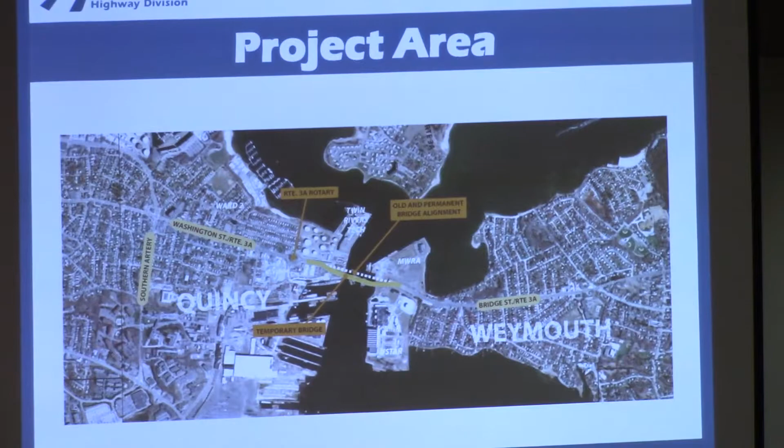Okay, just a general overview of the project. You see the project area. The new bridge will be on the alignment of the old structure, and you can see the temporary structure to the bottom of the page.

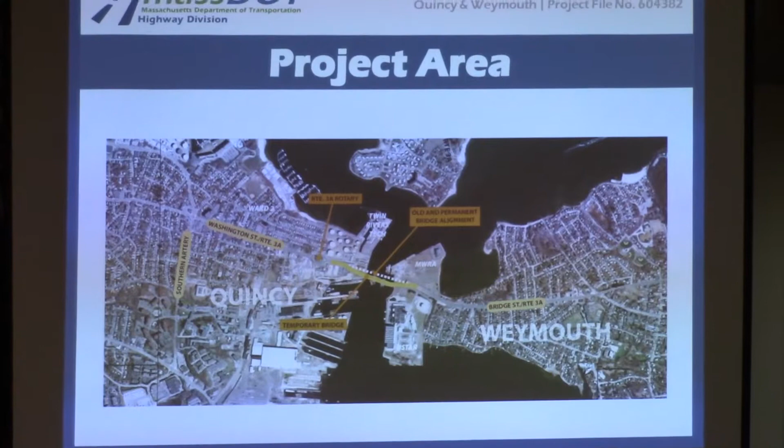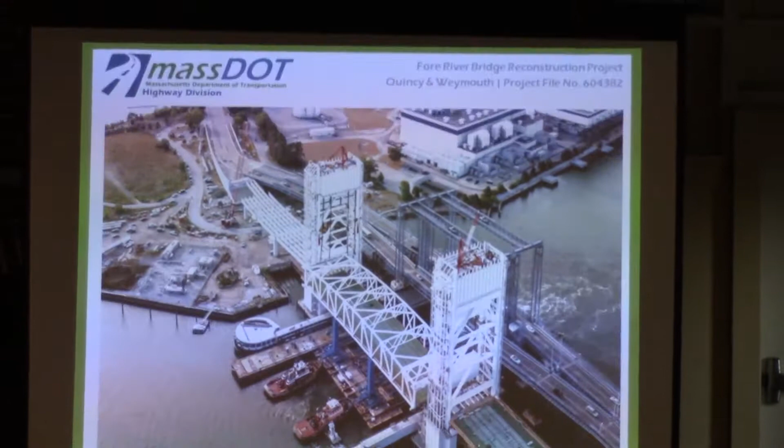Okay, last August, we did the float-in. We had the center lift span. You can see here that came out where it was built in the shipyard. We raised the existing temporary bridge up, came through the channel, turned around here, and then came in and set it in its final position.

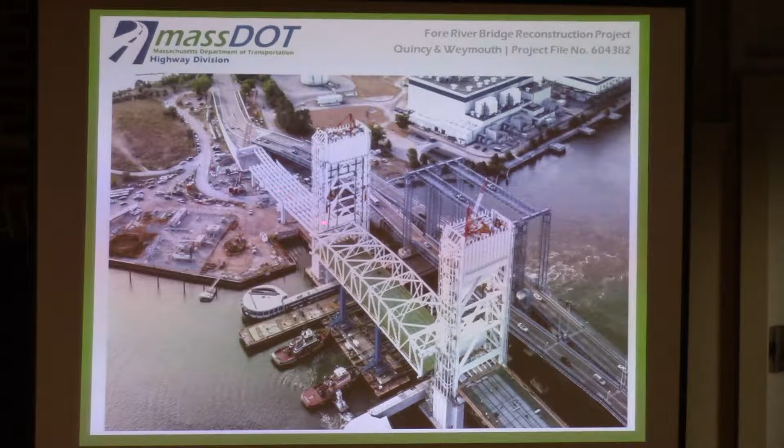What you can also kind of see here as well, again, this is mid-August 2016. You see over here, this is the Weymouth approach at its stage of construction with the girders. And then here in the bottom of the page, you see the Quincy approach. Pretty symmetric about the center of the bridge.

A little bit more of a step back here. You can see the Quincy approach in the foreground, over to the right, and then the Weymouth approach in the background.

The activities that remain to project completion include the remaining approach span work, which has really been in process from mid-May to the end of August 2017. We have existing bridge demolition, starting in September and proceeding until spring of 2018. And then the new bridge protection system, which we'll get into a little bit here, from January of '18 to February, until the fall of 2018.

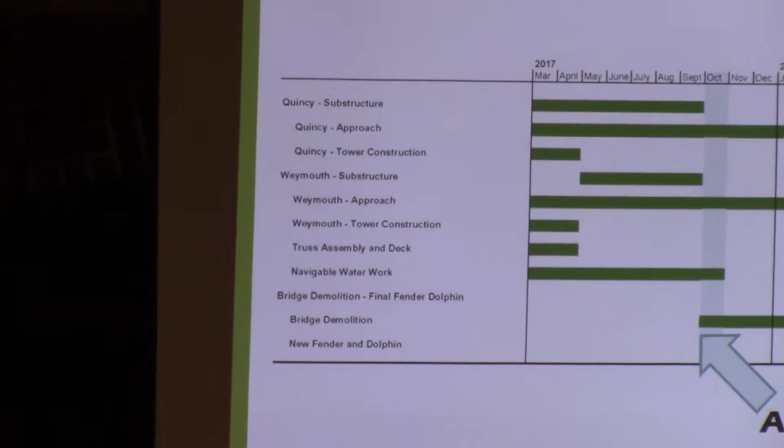A little bit more detail in terms of the schedule. I don't know how well you'll be able to see it in the back of the room, but really, you're looking through 2017, the balance of this year, with the approach span work finishing up here. Then, looking to the bottom, all 4 travel lanes on the new bridge by October 2017. We're going to get into that in more detail.

And then out in 2018, you see these green bars on the approaches. That includes final paving, surface restoration, landscaping, and the like. And then to the bottom, you see existing bridge demolition - that's the temporary bridge. And at the very bottom, you see dolphins and fenders - that's the bridge protection system on the water.

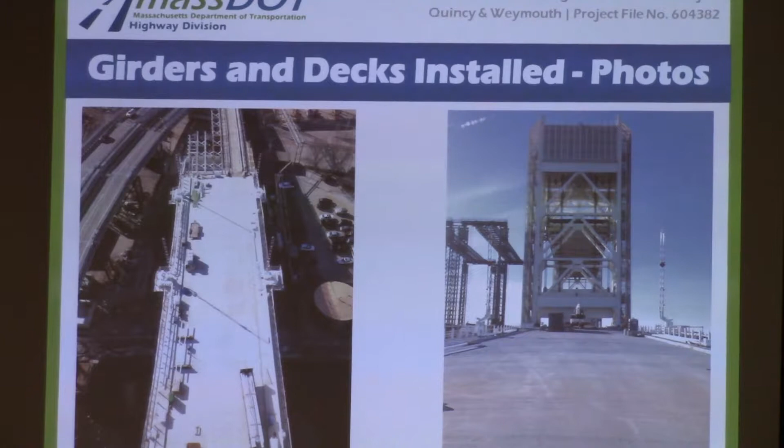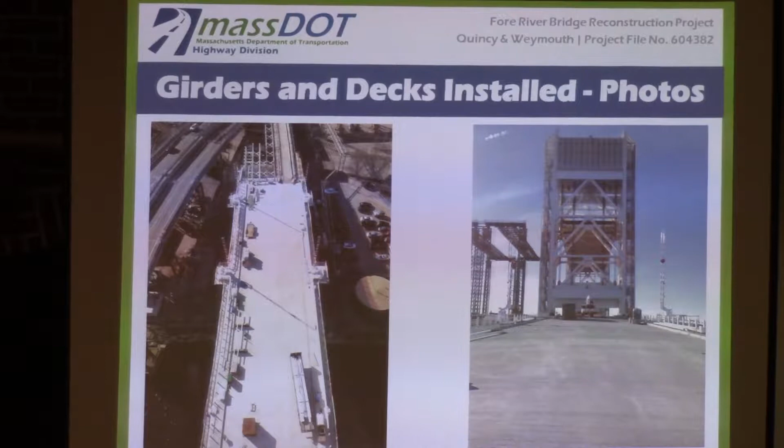What you see here are pictures from the fall, the approaches as they were finished out. On the left-hand side, you see the Quincy approach, the concrete deck slabs and the sidewalks and railing that go into place. And then on the right-hand side, you see the Weymouth approach. Both very much the same.

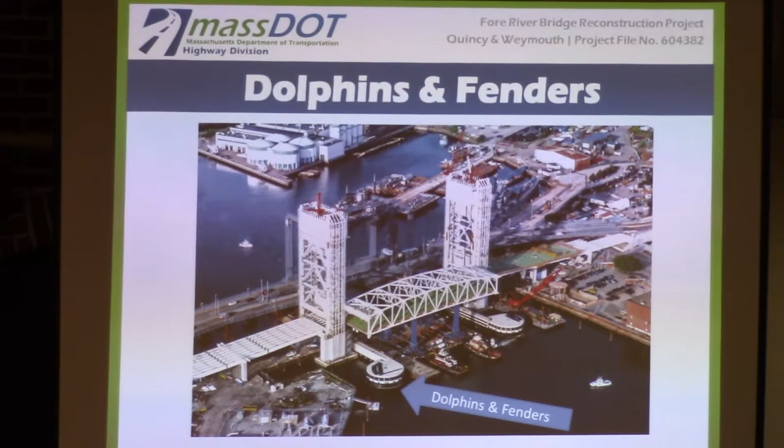Okay, a little bit more about dolphins and fenders. Once we have the existing temporary bridge out, we'll have all traffic onto the new bridge. Once we're in that phase, these elements - this circle is a dolphin, and this is the fendering - are the protection system for the new structure. This gets repeated on the inside once the existing temporary bridge is out of the way. That'll all take place again once all 4 lanes are on the new bridge, going into 2018.

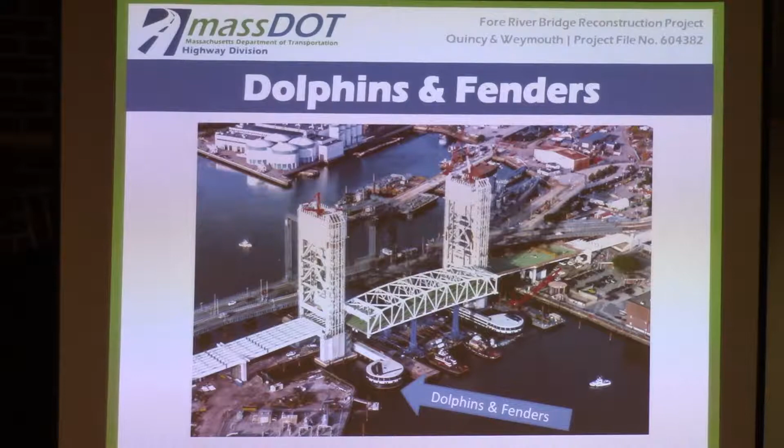So what are we going to do to come off the temporary bridge? Coming off the temporary bridge, we'll have some of the benefits here.

Fewer lane closures for maintenance with the new permanent structure. We are in a quarterly maintenance cycle as far as this existing temporary bridge, and it requires a lot more maintenance. It eliminates the weather-related problems of the temporary bridge, and we also have a reduction in noise over the existing temporary bridge with the new structure. The faster opening and closing, and all 4 lanes on the new bridge by October 1st, 2017.

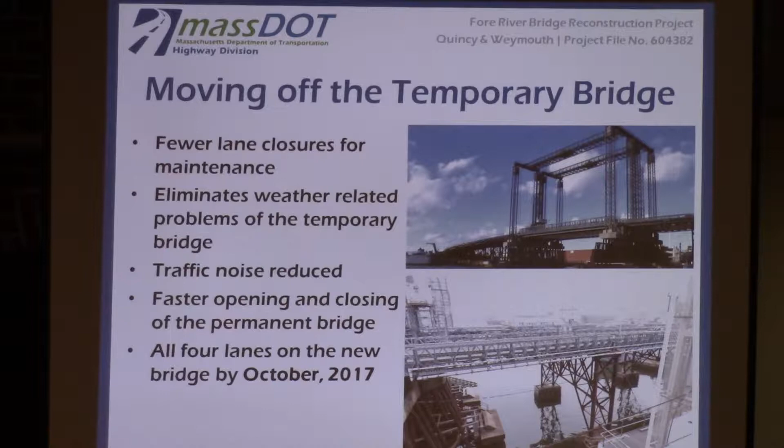Transition period that we're going to be working through here. The approach spans need to be completed and connected to the new bridge. We'll talk a little bit more about what's going on here. It requires the temporary lane reductions on Route 3A.

So from June 2nd to August 31st, we'll have 1 lane each way along the southern existing temporary bridge. Then through the month of September, we'll have 3 lanes moved over to the new bridge, with an alternating flow middle lane, so that in the peak periods we'll have 2 lanes inbound in the AM peak, and then for the PM peak we'll have 2 lanes heading outbound. And again, October 1st, 2017, all 4 lanes of traffic will be moved over onto the new structure.

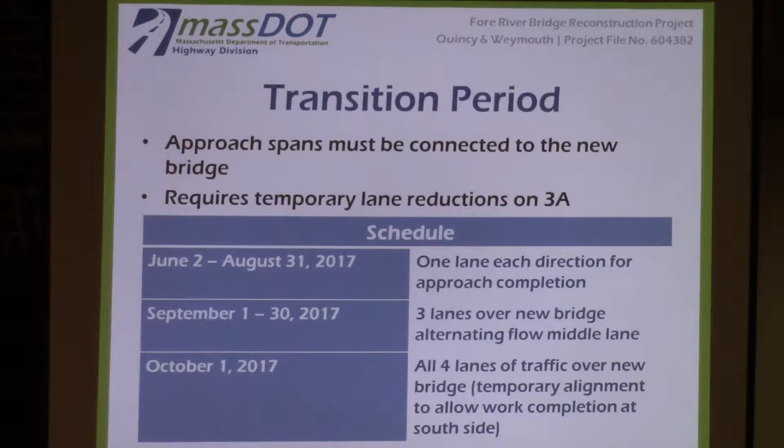It'll be in a temporary alignment as we finish sidewalks and railings to either side of the bridge, connecting to the new bridge.

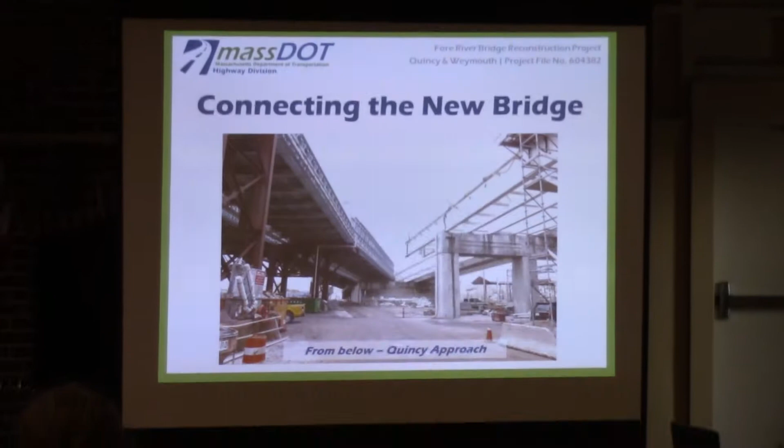So what you can see here is a picture that was recently taken. This is from the ground on the Quincy side, looking back towards the abutment. You can see the existing temporary bridge over to the left.

We have to connect these girders. You can see there are 3 girders here: 1, 2, and there's one hidden from view that begins back here and extends to the same spot. These girders tie in back here at the abutment, the remaining 3 girders. This section of the existing temporary bridge has to come offline for us to set these girders.

This is the Quincy side. It's virtually exactly the same on the Weymouth side. Yeah, you can see the extension of the girder as it makes its way back towards the abutment.

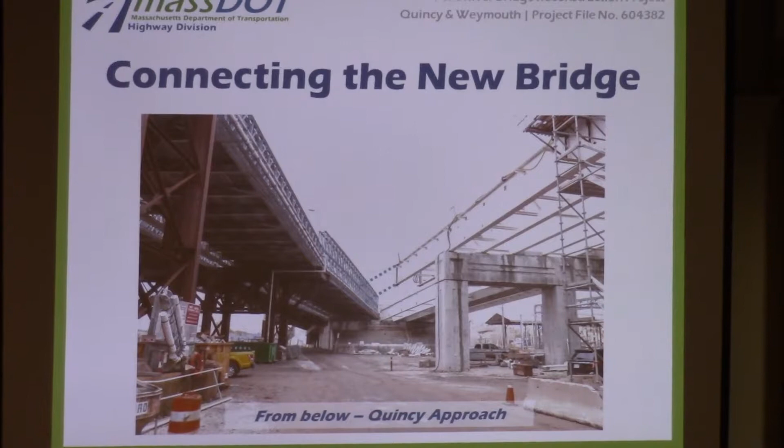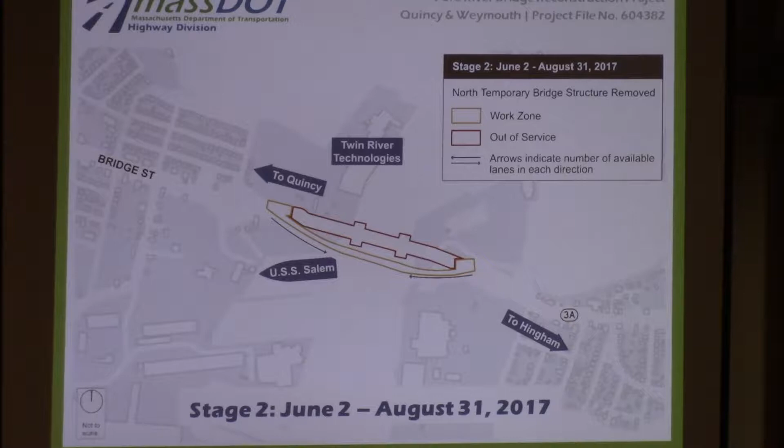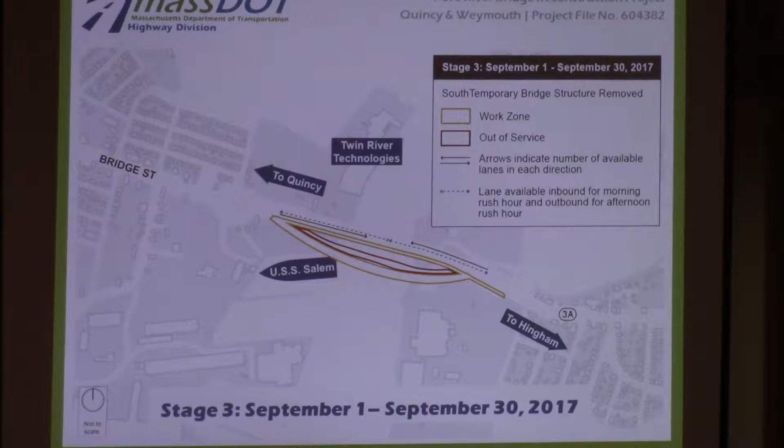Stage 3, we move the traffic over to the new bridge, and everything comes off of the temporary bridge. This is where you see the alternating flow lanes: 2 lanes inbound in the morning, switching over to 2 lanes outbound in the evening, switching back in that middle lane.

And this is the final phase, October 2017, October 1, where we have all 4 lanes on the new bridge.

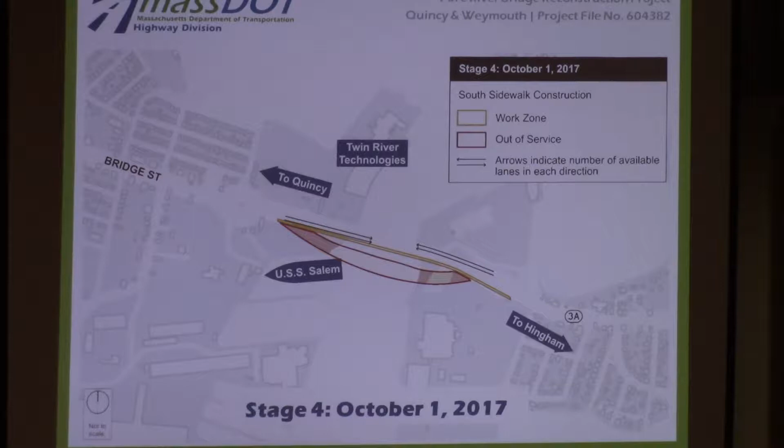So our approach, crews will work 20 hours a day, 6 days a week, to expedite this operation and reduce the impact on the community as far as traffic and congestion is concerned.

We also involve intersection improvements associated with the anticipated preferred alternate route. It's also part of local movement. Some other steps that we're taking to keep traffic moving include appropriate signage, police details, and we'll show you that in just a minute. We posted along the most likely alternate route, and we'll be doing website updates.

We operate a command center, if you will, working with the Quincy and Weymouth Police Departments each day as we monitor the traffic through these times and make adjustments as necessary based on the feedback that we have from them.

Those are the project hotlines, 24/7, and then drivers are encouraged to use other modes of transportation, whether it includes the commuter rail, buses, or ferry.

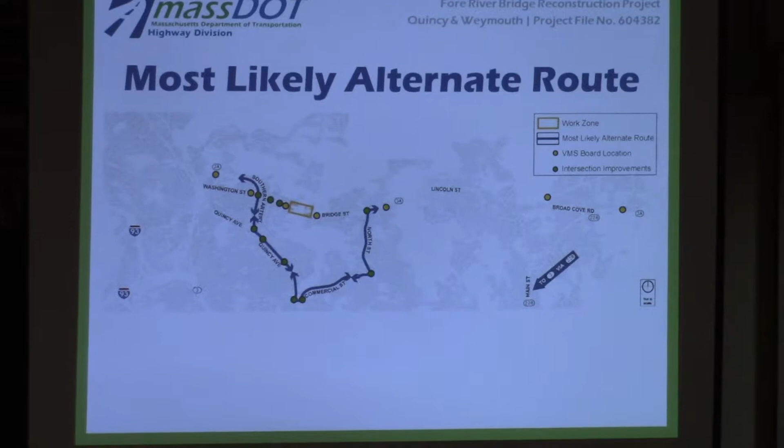What we've observed is the most likely alternate route is what's shown here in blue. Working from Weymouth towards Quincy, it includes North Street to Commercial, and then up Route 53 along Quincy Ave and back onto 3A.

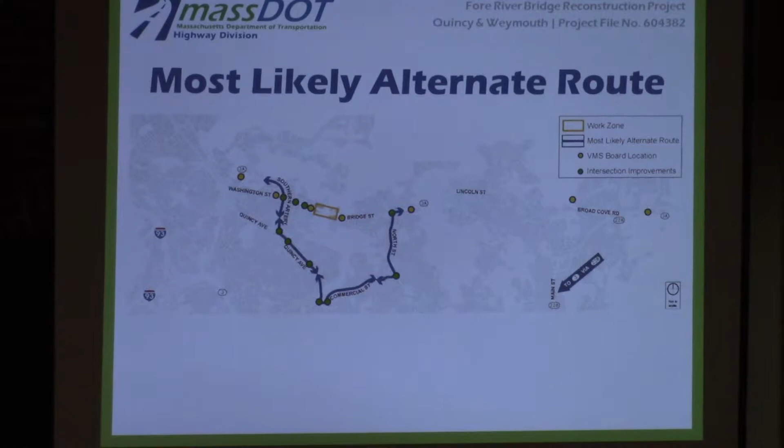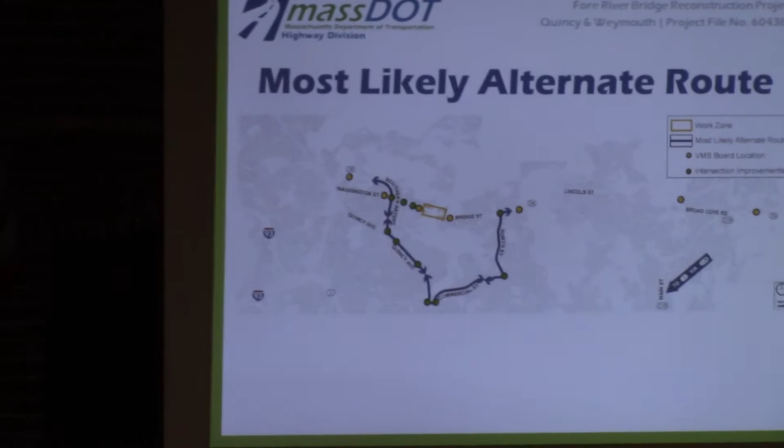What you can see in yellow bubbles are VMS board locations, and the green bubbles indicate intersection improvements. These are areas where signal timing changes have been implemented or will be implemented. They haven't been cut over yet; that's really going to take place in the days leading up to June 2nd.

You can see where these intersection improvements will be taking place. In addition to signal timing, we also have loop detectors and other enhancements to the intersection.

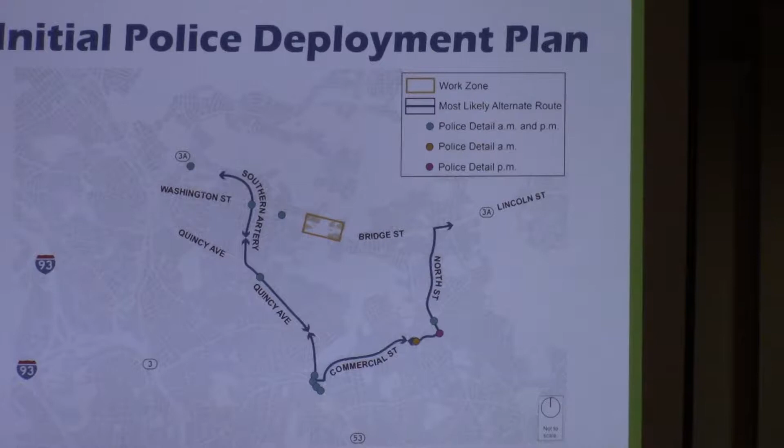This is also the initial police deployment plan, again working with your elected officials as well as the local police departments and first responders. These are locations that the towns have identified, as the traffic engineers, as the hot areas best served with police details to help pull the traffic through what we believe will be the most likely alternate route.

Some more about traffic mitigation. Signal timing will be adjusted along the route to alleviate traffic congestion to the extent feasible. Traffic will be monitored daily along the route for adjustments and fine tuning. As we see people adjust their daily schedules, we're going to monitor that and make adjustments to the signals as necessary, again to the greatest extent possible to alleviate the congestion.

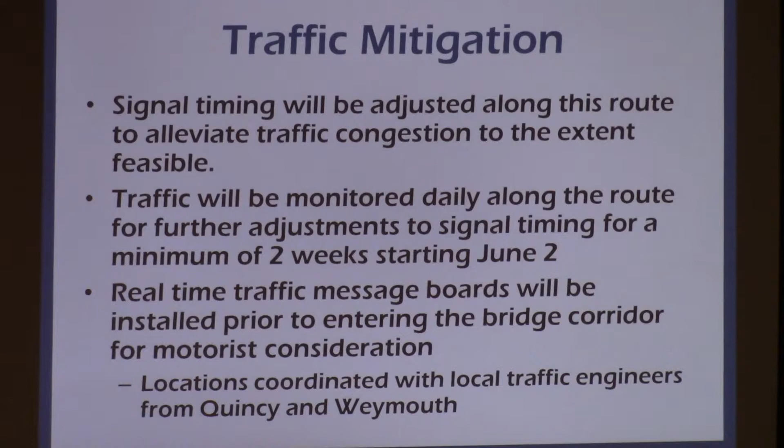We'll also be putting out some real-time traffic message boards. You've seen them on the highways that Mass DOT has put out as permanent systems. These will be temporary units. There will be 3 units.

The first unit, up on the top left here, is up by the Quincy Police Station, really over on the cemetery side in the island by the cemetery. We'll put a real-time traffic message board up there to allow motorists to know the time to get to the Fore River Bridge, and then allow them to gauge which route to take, whether they continue on an alternate route or make their way like they normally do, straight down Route 3A.

Then to the south of the project, we have one near the Hingham Rotary, actually located on Summer Street, to grab traffic coming in this direction. The third unit is over here on Route 3A, heading back towards Cohasset, the other end of Hingham. Again, to catch motorists before they get into this corridor with the bridge, so they can choose to select another route, whatever that might be.

Finally, on traffic mitigation, again we're working with the elected officials and the city traffic engineers. Heavy truck concerns were voiced about heavy trucks going through neighborhoods.